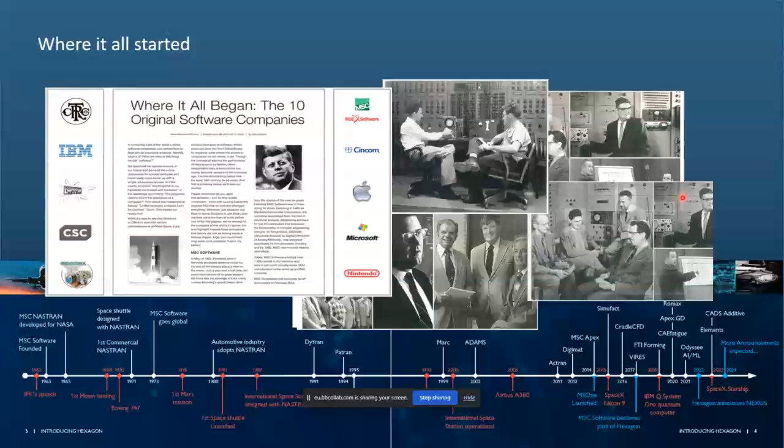Just to give a little bit of history, MSC Software was the first simulation technology to be created. It was created for the US space program, where MSC Software was appointed as the company to create a solver that can calculate, not the trajectory, sorry, I meant the stress calculation on the rocket during its trip in space.

So I'm not going too far into how we moved from there to then develop all the simulation. But at the beginning, it was just a solver, and then progress was made to add a user interface, to add other types of simulation, because at the beginning it was just load that was evaluated. Then we had sound and CFD. And this is what MSC Software is about.

Actually, everything in the market that has a sort of physics where the theory is known and well mastered is likely to have a simulation technology that goes with it. And the reason is simple. As you have seen in MSD, when you deal with the script, some actions can be repetitive and sometimes time consuming, and in business or industry, time is always related to money. And as I said earlier, the funds are limited. So all of those technologies have been created in almost every sector.

We have the medical one, electric one, the railway, automotive, aerospace. I can say some companies, for instance, in aerospace, we have Incoma in South Africa, or Paramount, that are also in defense. We also have heavy equipment like SIMTEQ or RAM equipment. And then we have the food industry. As I say, railway, we have Transnet for the railway, and energy and gas. We have Eskom or OPEC, for instance.

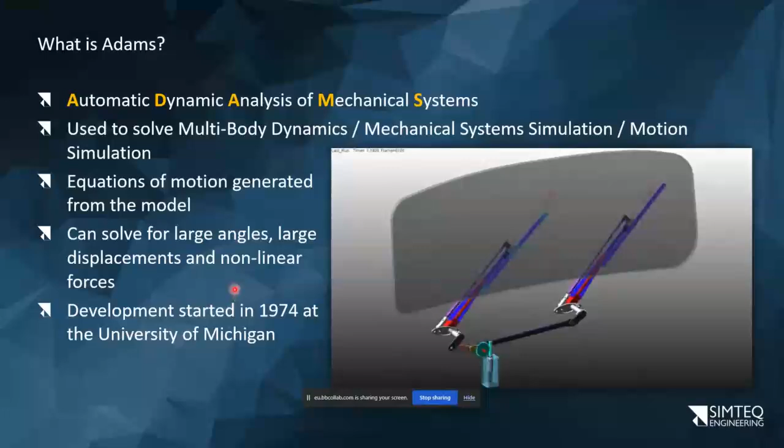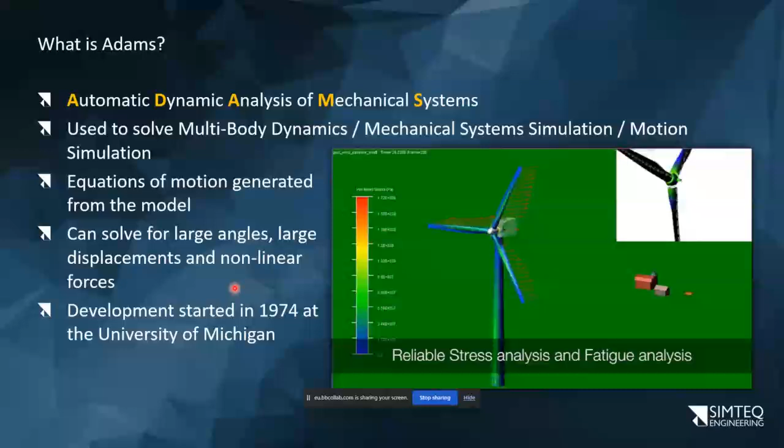It was created in 1974 at the University of Michigan. So at the beginning, it was not a commercial product. It was bought by MSC Software afterwards, but it was initially a university project.

So to the question, why build a multi-body dynamic model? It is firstly to identify what we have in the model. And what I mean by that is, firstly, to know how the model will move. This is just to see how it will move, how it will interact, which part will be in contact with another one, because there is always a difference between the design that is made for the production and the initial concept.

Because when a design is made, actually a CAD file is made, it takes into account some details like welding, like tolerances, but these are not taken into account when you are in the R&D phase, and when we want to first see how the system will move. For a simple system, it's easy to imagine how the system will move.

But when we have 100 parts moving and some are hidden behind some other parts, it's just too complicated for your eye to identify this one will move that way and will be locked or touched or will pass to a certain configuration. So this is the first use of Adams. It is just to take the simulation to analyze how this will move. It's valid for Adams, but it is a multibody dynamic general thing.

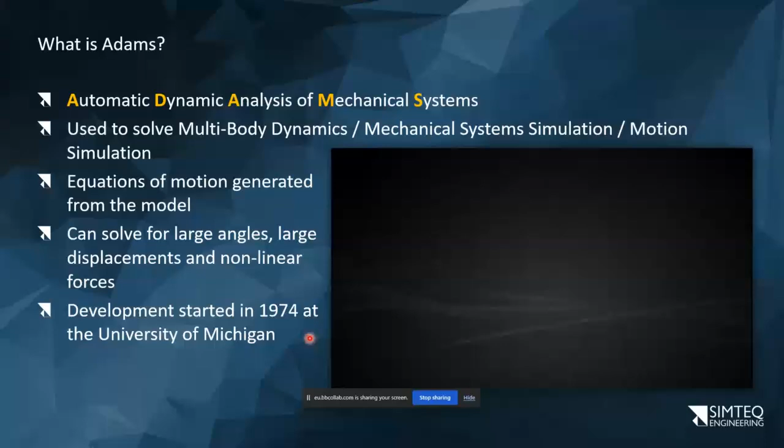So the principle here, as you saw in the first video, I can quickly come back to it if it's not too far, just to show it. This model actually uses a flexible body. Okay, well, at least you have seen that. So this actual model uses a flexible body coupled to a rigid body.

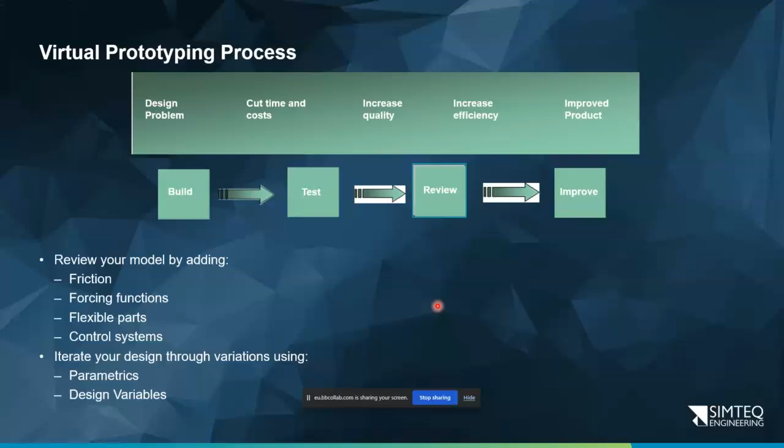So the point is, we can use dynamic load and extract it from Adams to apply it on the FEA model, or we can do it while running the model. Adams is not that powerful in terms of running flexible bodies. It does give some input or insight into what the stress and displacement are inside it, but at the end of the day, it's always better to use a proper FEM model if you want to work with flexible bodies. You can extract the dynamic load from Adams, but it will always be better to use a flexible body in a proper FEM model.

When we are done setting up our system for the first time, we can now run it. The good thing here is it's very simple to run. As I said, the first purpose when they created this software was to make engineers able to see how the system will work.

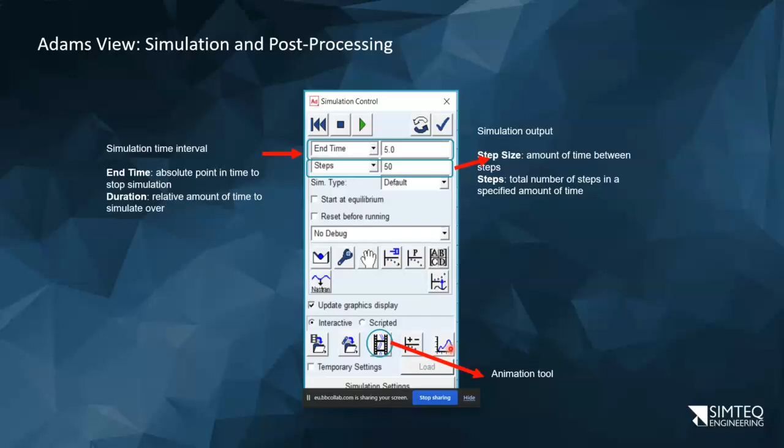Then we have the plot button, which allows us to get insight into different data that have been set before, the data that has been measured. When you press the plot button, we open the post-processing part of the software, where we can do two things: we can either animate it again, or just plot the curve.

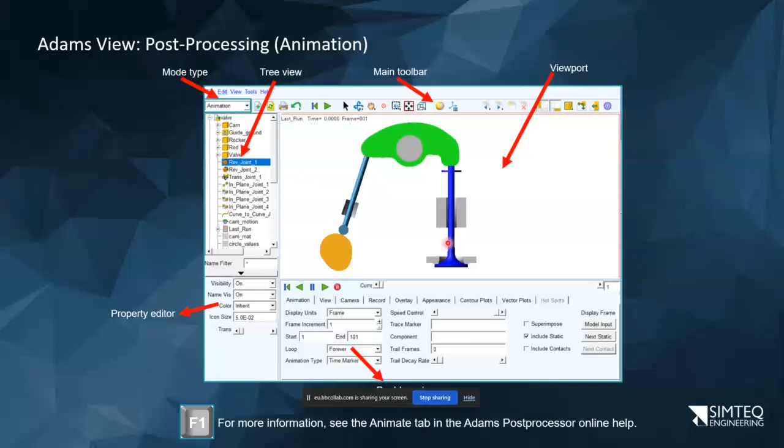At a certain point, when you have a particular case and want to see at which point of the animation there is a spike in the curve, for instance, we usually split the grid so that we can have the animation at the same time as the curve. Then you have a cursor that runs through the curve at the same time the animation is running. So on this side, you can decide if you want animation or the plot.

We have the tree view on that side. The property editor is where you can see the animation mode. So we have the property editor here, and then we have the ability to run or modify different parameters of the animation. Also, we have the viewport, which is not actually a working grid.

The toolbar here is really important because it allows you to have different insight into the software. Whether you want to just see something, or analyze something, or retrieve a specific part of the analysis, you will really need the main toolbar.

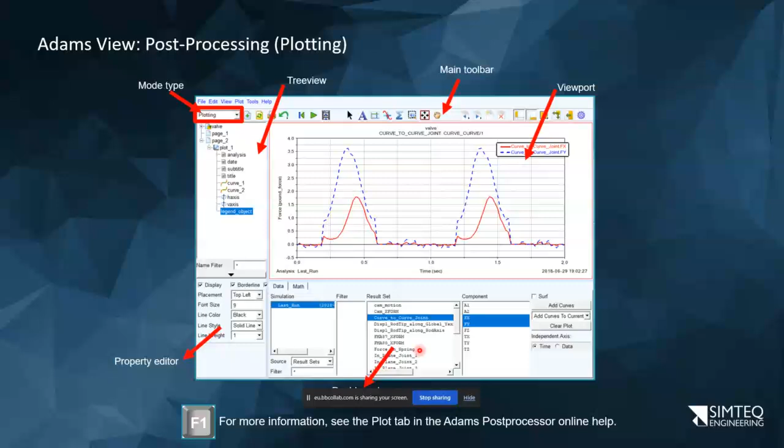You can either select it—meaning there are results that are measured anyway—but there are others that are not measured, and you have to pick them, set them so that you have the result that you want. There's also a different way of getting a result, and I'll get to that a bit later on.

So to illustrate what I explained, I will give you a simple example of a pendulum and the type of result that we can have. The thing that you do realize is...

At this stage we don't properly represent a system, and the reason is that it's simple—we use rigid body. The truth is, in reality, there is no rigid body. That means when we use multibody dynamics, we are getting insight into something, but a full simulation actually requires what you'd call a co-simulation, where you mix a powerful FEA model coupled with nonlinear FEA, coupled with CFD, coupled with multibody dynamics. This is life, but it's also really expensive. It's not always practical, but at least you have the insight.

Then we use ideal joints. This brings a particular challenge—the fact that there is no ideal joint in real life.

We always have to bear in mind that at the end of the day, a simulation is as good as the engineer that uses it. That means you will have more results than what you get from a script, for instance when you hard code something. The good expression is you're gonna get that result easier than when you use a script, but you still have to analyze it.

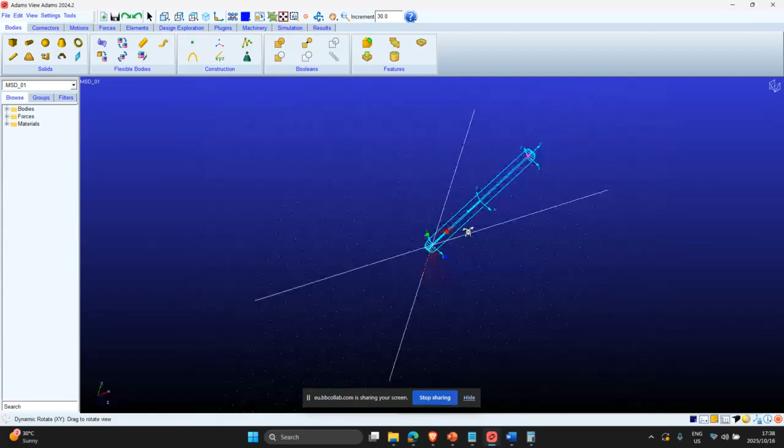I'm working on the 2D side, but actually it's a 3D model, so I can even change it for you to see. So it's a 3D model, but I can decide to just work on the 2D plane.

So this is a pendulum, so it will be really easy. I just apply a revolute joint between the ground and the part, and I select this point, which is a coincidence between the origin of the ground and a local coordinate system—actually a part coordinate system instead of the part.

That is it as far as the simulation setup. I can just directly go and simulate it. That would be a mistake, though, because I need to add the density properly. I'll set it to 2 seconds, with a time step of, let's say, 200. Now it should be smooth.

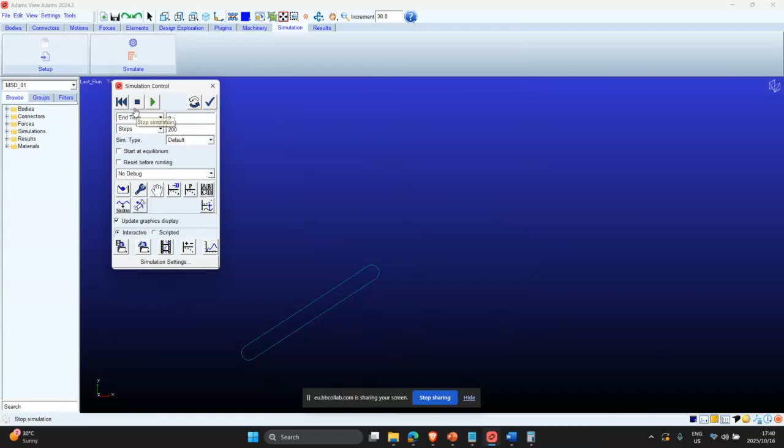As I said, I can run it again—I can just come back and run it. It doesn't take time because the system is simple. It would be more difficult if we had something complex with 1,000 parts, or not even that many. You get it easily, so just press on animation and you can have it without running it again, which also saves memory on your computer.

Once you are done with the simulation, there are different aspects of the simulation I could talk about, but I'll keep it simple this time, because the point of the lecture is to give you an introduction for those who will be interested in more training or more information about the system or the simulation. You can contact me and we can discuss what your needs will be.

So when you go to the post-processor, as I said, we have the choice between the plot and the animation. There's more to it, but we're gonna keep it simple. When you go to the animation, you just have to load the animation, and you can split the space to have two views, and I can just go on plotting on that side.

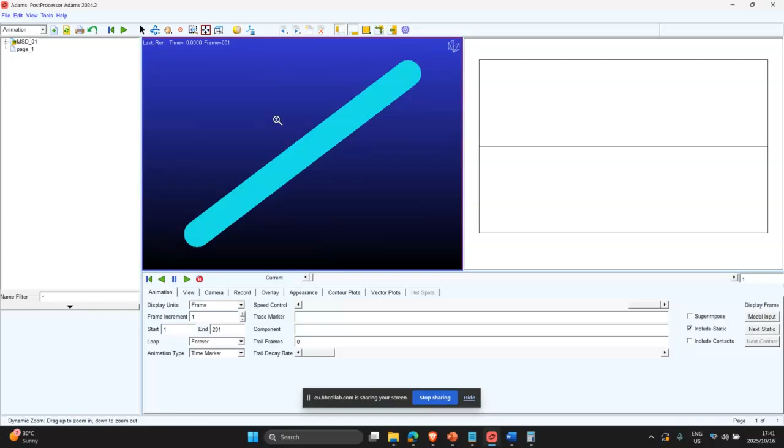When I'm on that side, to move from one side to another, you just have to click on it, and you actually see that there is a shift—a shift in the view. So just make it wireframe like that, and I will choose, let's say, to work on the result.

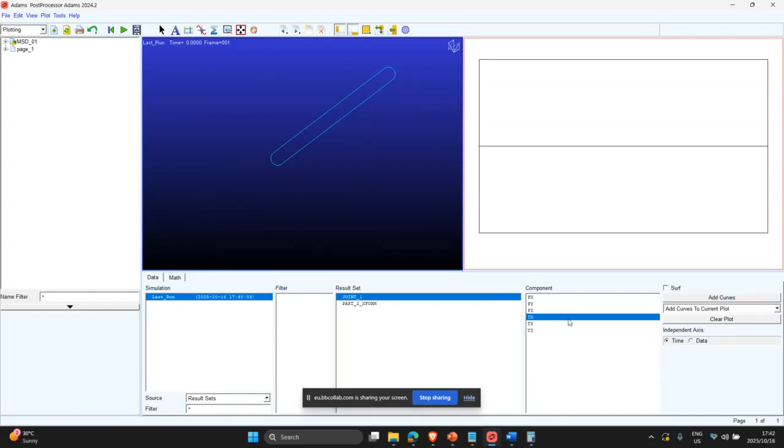I want to work on the joint and the torque applied in one direction. Let's see it like that. So we have the torque applied in one direction that is extremely high, because it's 1 million Newton millimeters.

That is about 1,000 Newton millimeter. Sorry, that is extremely high. That is about 1,000 Newton meters. And this is also one of the downfalls of using a perfect joint, because it can give some particular results. So that's why it's always important to refine the system as much as possible until you get a system close to the reality, because now you can start asking why we have this result. This is just an insight, but it's better to ask why we have the result afterwards.

We have the same case in the Y direction, in Z direction it is 0 as expected, and we also have the force applied here. So all of those results are meant to be analyzed. It's not something to just take. You need to answer the question why this happened like that. So when we go on the part side, this was everything that was applied on the joint that is located here, and I can even animate it just for you to see.

Okay, I'm trying to move this one. So I can go on this side and animate the system, and you can see on that side which part of the simulation gives which result. So this is really important when we have a case to be analyzed, to know exactly what happened when. In that case it is really easy to understand.

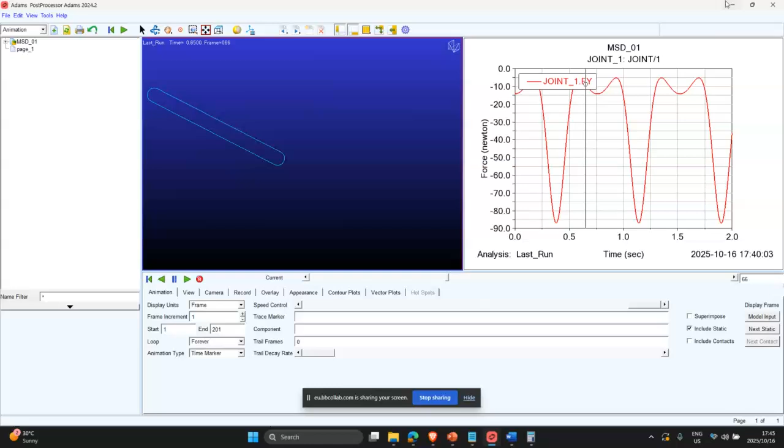If we want to take into account the resistance of the air, we need to couple Adams with a CFD software. We can provide that force, or we can assume the force that is applied on it and run a script at the same time as the simulation to simulate that force while the movement is going on. So this is about it for this demonstration. I can carry on with the presentation again.

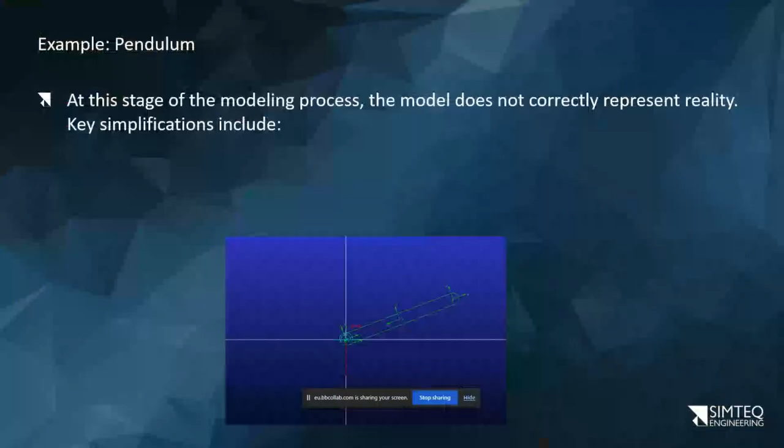So as I said, now we are going to the world of rapid prototyping. When we do rapid prototyping, the most important thing again is the data that can be extracted from the simulation. As I said, this is basic. When you get to write a report, you don't just put pretty pictures. You need data and you need explanation on what is going on. So the easiest and the most efficient way to get those data is to do the simulation. This is available for any type of simulation.

And in Adams, we need to keep in mind two concepts. The first one is at the design level: what you have to keep in mind when you are designing or working on Adams. And on the other side, at the force level, the second concept is which type of force or which type of data I can get from the simulation, how to analyze it, and how to evaluate it, because it is really important to know that your simulation is accurate. Most of the time it is required for engineers to be able to run a hand calculation of any simulation they are running.

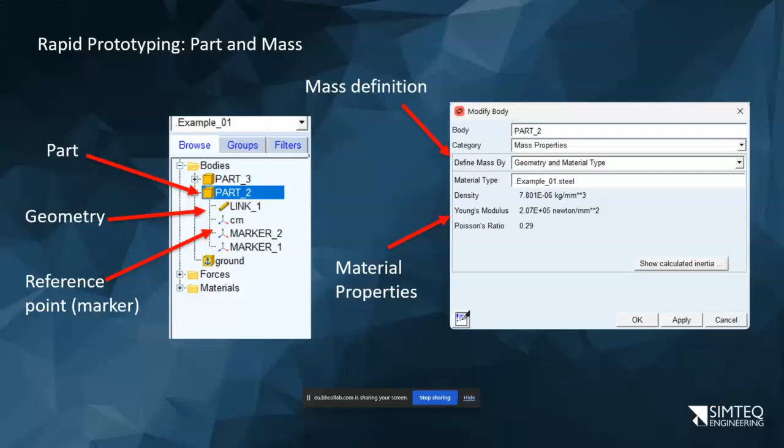What is really important is the center of mass and the marker inside of the part on its own. And if you don't have any geometry, you can still assign it directly. And the thing is, when you create a geometry, or when you import a geometry, Adams will directly define what is the center of mass, and will apply two markers. It depends, but most of the time it's two markers. And it will also give it a mass. And by default, it always gives the density, so the property of steel, to any part that is created or imported in Adams. This can be changed afterward, and I'll show how in the same way.

Then we have, as I mentioned earlier, the center of mass. It's created directly when you create the geometry, but the center of mass is linked to the concept of local coordinate system and global coordinate system. So technically, the global coordinate system in Adams is a rigid coordinate system attached to the ground, and this defines the zero of the system. By definition, everything is relative to the ground. That means to the global coordinate system. Then we have the local coordinate system, and in that we have two types. We have the marker and the part coordinate systems.

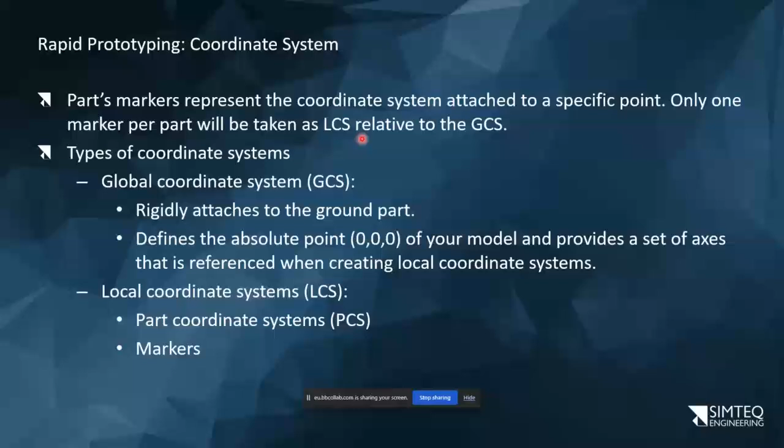Technically, the marker is just a local coordinate system that can be either added automatically by Adams on your model, or you can add it manually. The part coordinate system and the marker are defined by Adams directly in the model when you implement it, when you import it, or when you create it. But if you need for some reason to add another marker or a local coordinate system, you can add that one. By definition, in the part coordinate system every measurement will be made relative to that point, which will be the center of mass by definition. But this is something that can also be changed if you want.

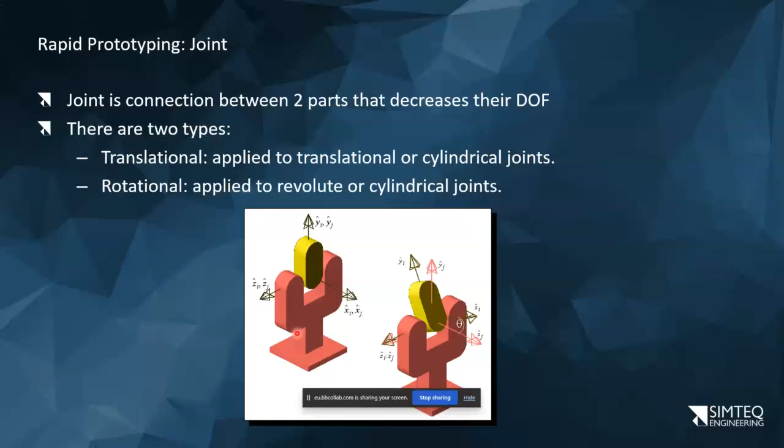And then we have the joints. As I said, the joints aim to attach two parts and also remove the degrees of freedom that those parts have relative to each other. So we have two types of joint. We have the translational type, like for instance the cylindrical joint or the translational joint. And we have also the rotational type of joint. For instance, the spherical joint or the revolute joint are rotational joints. And to better explain that, I will give you an example of a driveline that we can find.

Typically, this type of drive line is something that you can find in military vehicles, when you have the engine and the transfer case in two different places, and usually it's really complicated how the power must go from the engine to the wheel. In a tank, for instance, you don't usually have everything aligned like in a car.

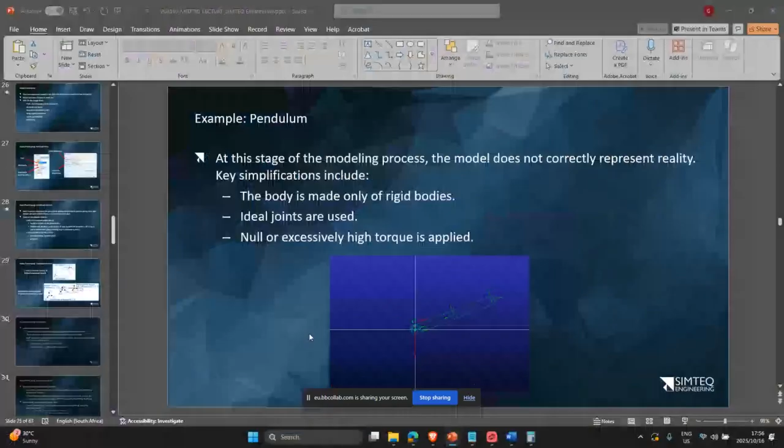So in that case, you need this type of drive line, which is actually made of Hooke joints and revolute joints. So I will use this example to explain the concept of parts, local and global coordinate systems, and also joints in Adams. So I will not save this one. Just open a new one. Okay, I will just open this one.

Oh, I also wanted to ask, I'm asking a bit late, did you start recording the session for those who are not there? Yes, I'm still recording, so everything is still good on my side. Ah, okay, okay. I should have asked in the beginning. Okay.

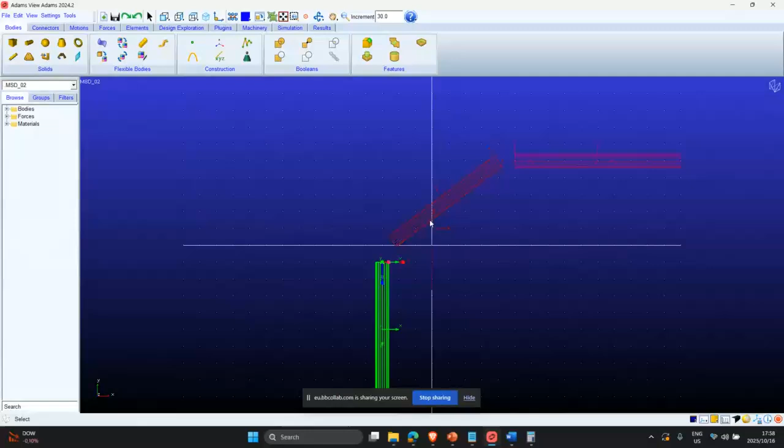So I will just open a new model, call it MSD. So okay. The working directory is the same, the gravity, the units are the same. Okay, I can just open it. I will use a cylinder. It's better to fix it, otherwise it becomes just difficult to manage. Okay. I will just keep it the same. Yes, it looks like it.

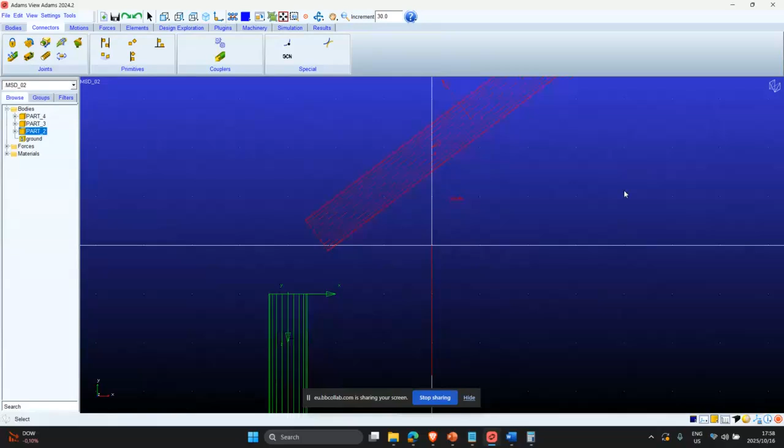Okay. So I will just apply the revolute joint in between this part. As you can see on this part, only one marker has been assigned on one side of the cylinder, not on this one. But if I want, I can just come here and add one myself. Choose add on the parts. So select the parts, select the point, not precise, and then I have a marker on that side. So that's about it on how to add a marker.

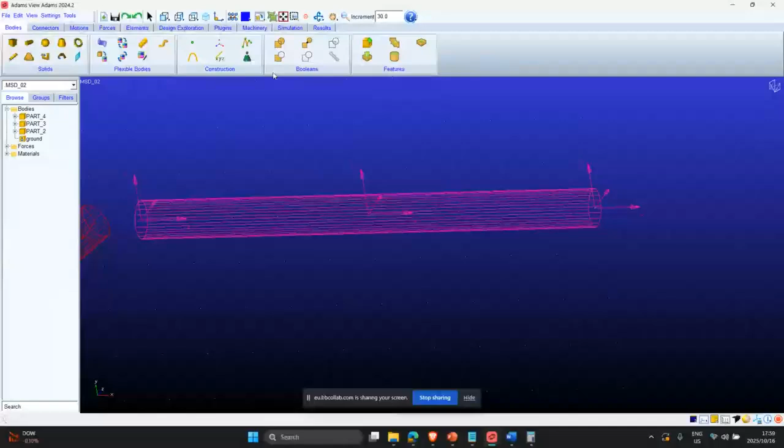This is really important because even though in that case this point is virtual, it doesn't actually exist, if you put a cursor on it, you will find it. On some geometry it's not useful. And if I had to add a joint at this particular point, like I want to add now, I add the joint by selecting the ground. Actually, we select the ground just by clicking on the working grid, and then the parts.

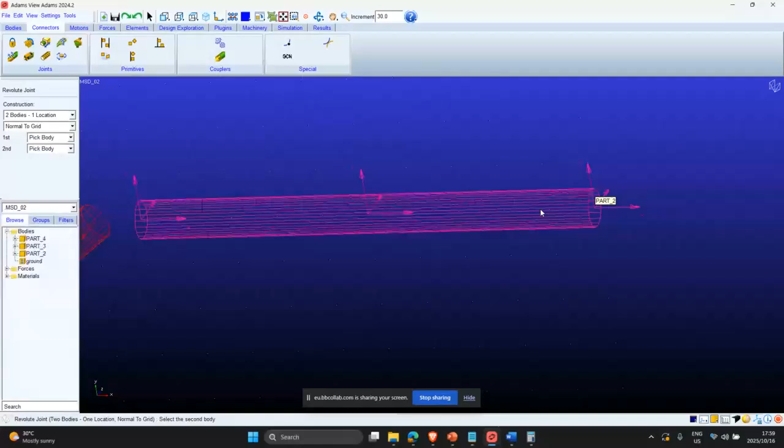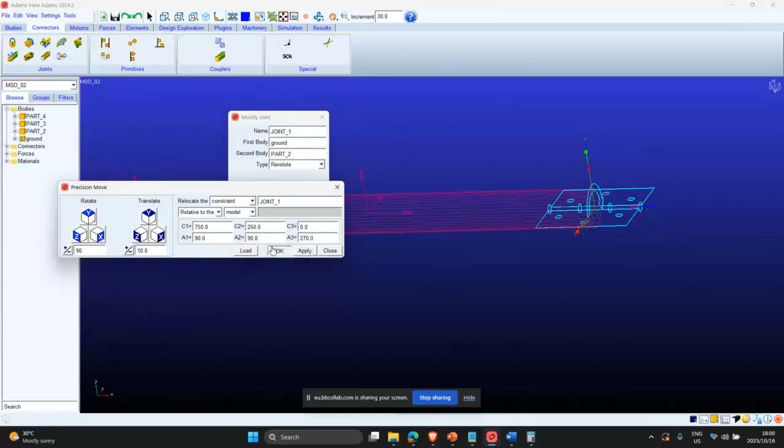And then here we have this, but again, we have to move it since it's not applied in the right direction. So I will just modify the joint a bit. Oh, no, I didn't click on the joint. Okay. So I can double click there to modify it. I can select this, rotate about the y-axis by 90 degrees, and just select this. And now the joint has the right orientation. Just apply. Okay.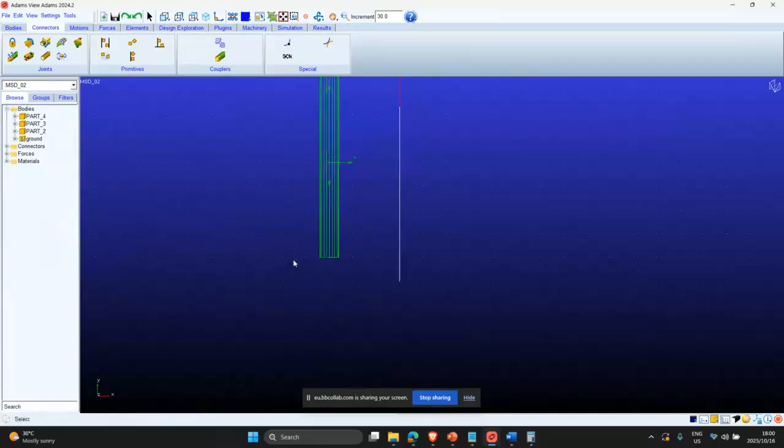This is exactly the same case for the part underneath here. Just to show you, okay. So I will not add a marker here, but you will see that we are able to select a point at this stage. This is just because the shape is simple and Adams is able to pick up what I want to do. But when the shape becomes complex, it's always better to assign it.

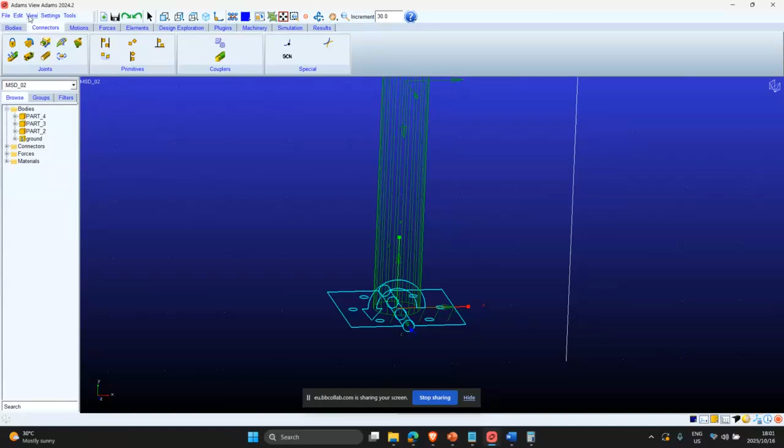So I need to rotate it around the x-axis, this one, to have it aligned with the cylinder. Otherwise, I won't be able to spin it. So again, I can just select the orientation like this, 90 degrees around the x-axis, and that's it. Okay.

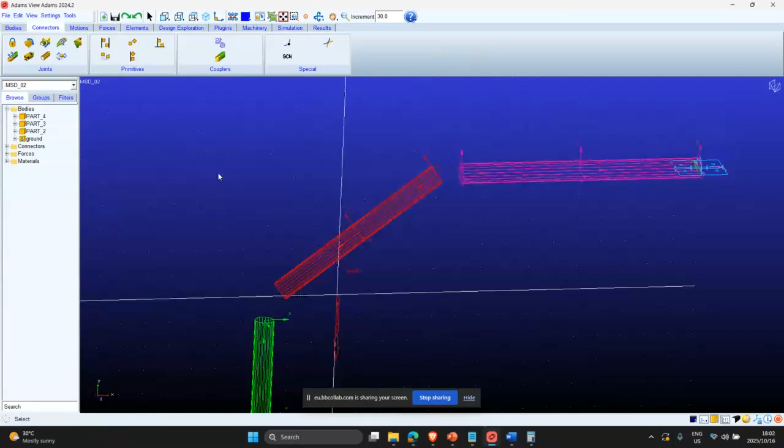Then I will add the Hooke joint between those two. Since I'm working on a plane, I don't have to worry about the alignment of the cylinders because I know that they are aligned. So the Hooke joint will work. But if it was too offset, it could have been a problem. Even if Adams always tries to solve those types of problems, it's always better to have an accurate system.

So I will just create a Hooke joint, this one, between those two parts at, let me zoom a bit, at this point, following this feature and this one. So usually the good thing to do is to always do a sanity check to make sure that everything is fine when you are modeling a system.

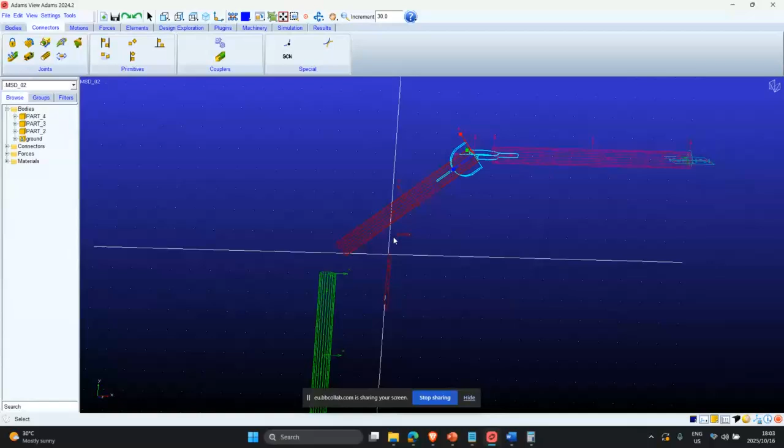The reason is, if you put too many constraints without checking, you can reach a point where, how can I say it, you put in too much effort and you didn't realize that you made a mistake, and now it's difficult to find the mistake, since you didn't check at each step. So it's always important to do sanity checks on your system, especially when you start.

Then I will apply the Hooke joint on this face, between those two. So it's between those two at this point, following this feature. Okay. You see, now the problem is it's not pointing in the right direction. And the reason is very simple: I didn't define any, how do you call it, any marker pointing in the right direction, but I can still make it. No. Okay, for some reason it's not working, so I will go the other way around.

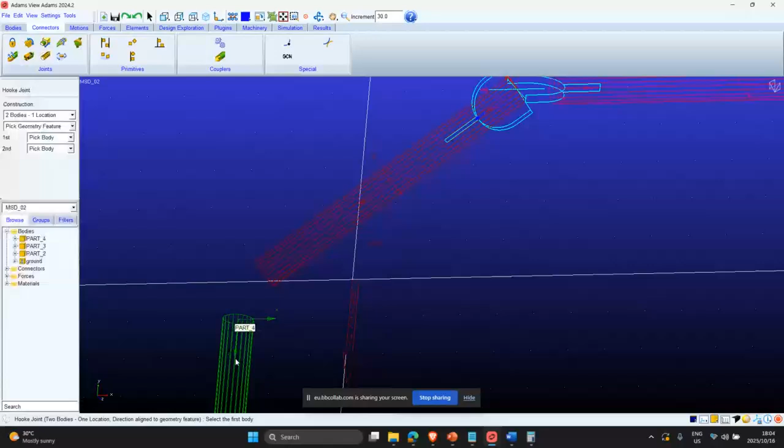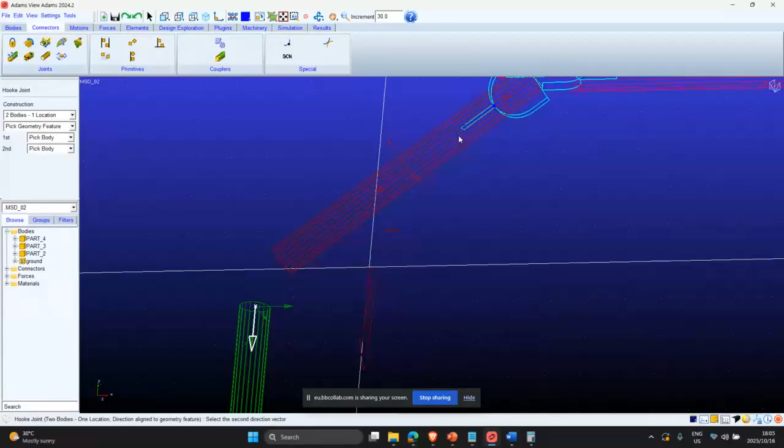Since I have this marker, I can design between this one and this one. No. It's better to use it that way. You see, this is the reality of anyone who deals with design. Even if you are used to something, you can always have an issue at a certain point.

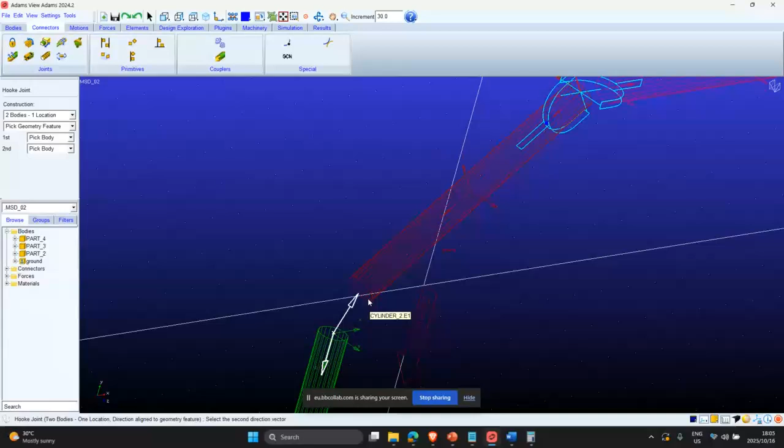Okay, this is because the difference between both of them is too large. I cannot. Yeah, the difference between both of them is too large. I have to change it a bit. And this is what I meant by the offset. Now I cannot point it properly because there is an offset. And if I leave it like this, it won't be able to spin. And if I run it right now, you will find the mistake. So to solve this problem, I have to align it to make sure that the joint will work.

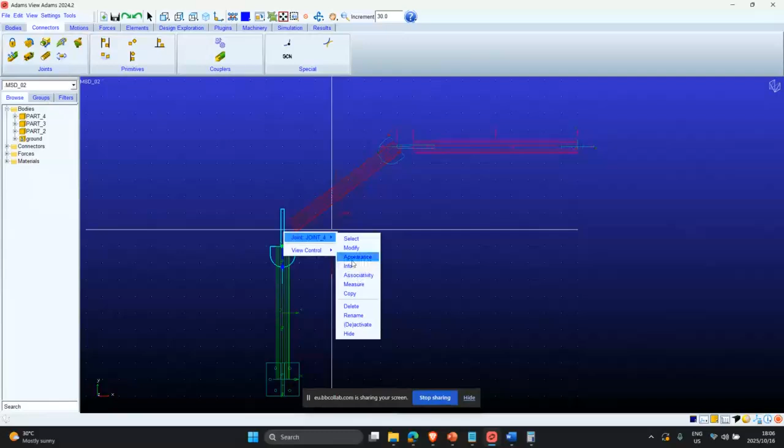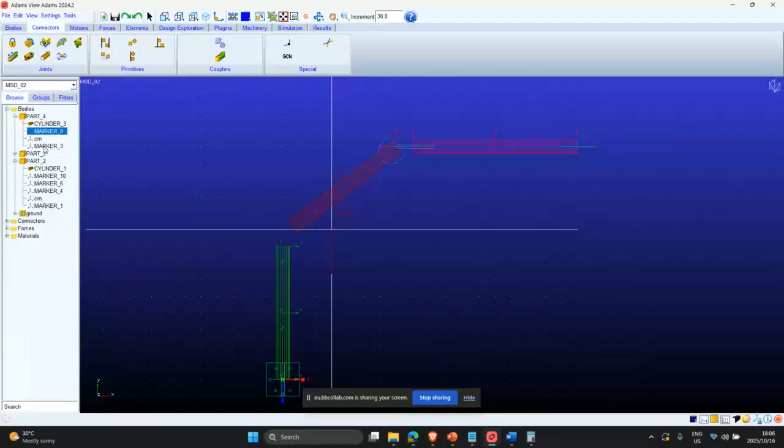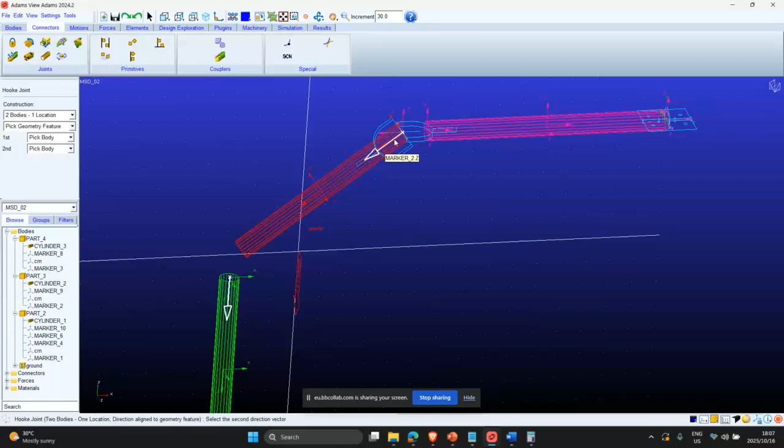And this is okay. I actually created this part, but on the real design, you will always find that it's not aligned enough to apply a Hooke joint. I will just delete that one. Okay, I can change. Oh, no, this is the extension. Okay, it's going on your right. Technically, it should be fine now. Okay, looks like I still have the same issue. Let's see.

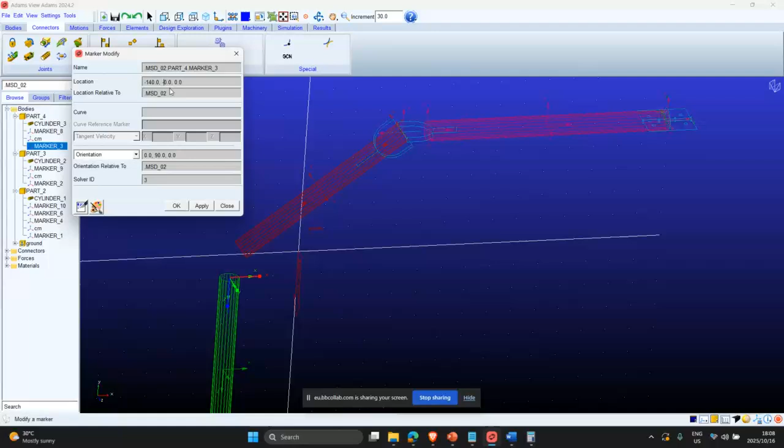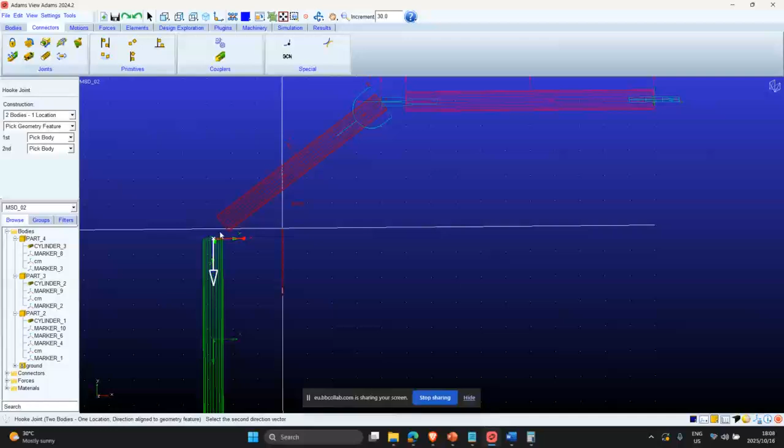Okay, this is the reality of doing a live demo. Okay, I don't know why I'm struggling with this one. It's not supposed to be like this. I'm not sure that this one will work.

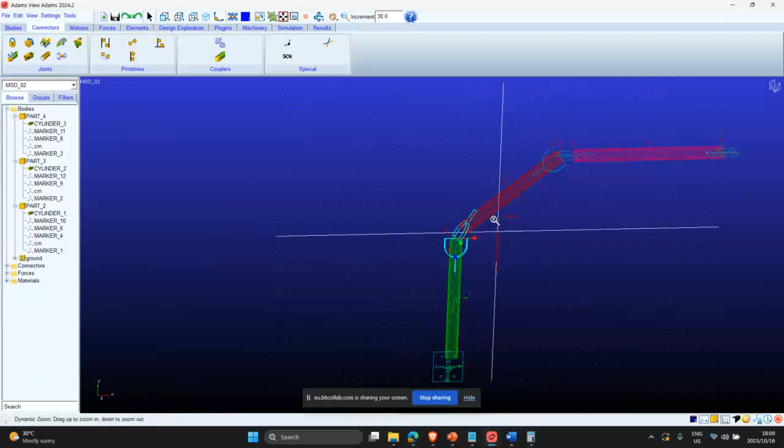Sorry, Gal, just a quick question from my side. Although we're now working with a fairly simple geometry, would it not be easier in this case to specify a marker on this left-hand side of the cylinder to get that vector that you're trying to construct? Yes, I will do that. I was trying to avoid that option, but I think I don't have a choice. I have to.

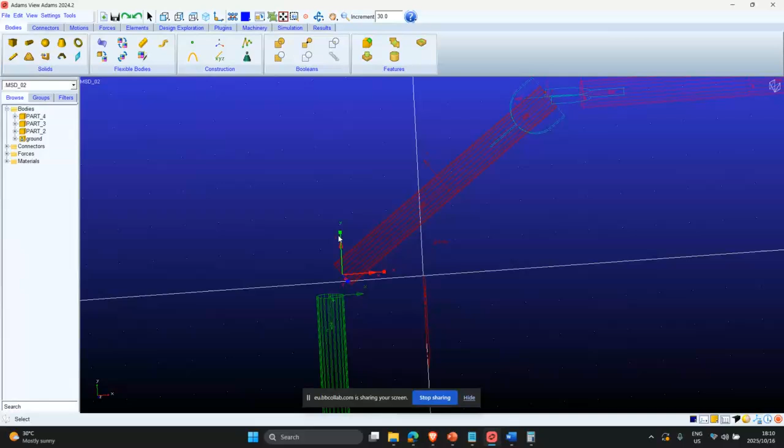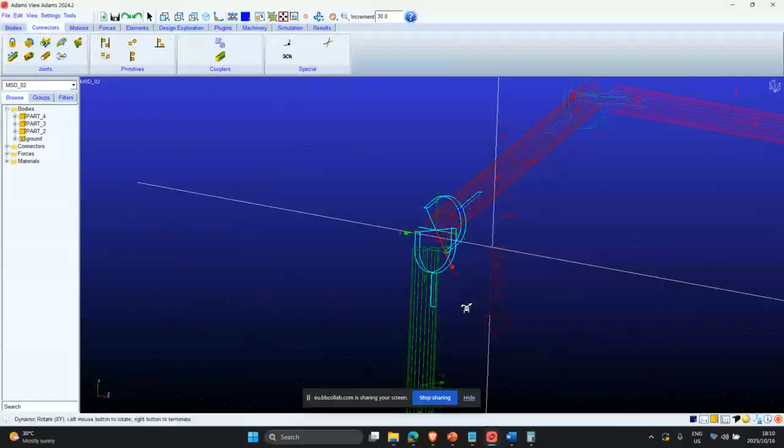Actually, I tried to avoid it because now I have to find the right angle to turn this one. So this is also the reason why I was trying to avoid it, because I'm dealing with complex geometry. The good thing to do in that kind of situation is to technically apply it on this one. Okay, that's correct. I'm a bit worried about this offset, but let's try it to see if it's working. If it's not, we have to make it easier.

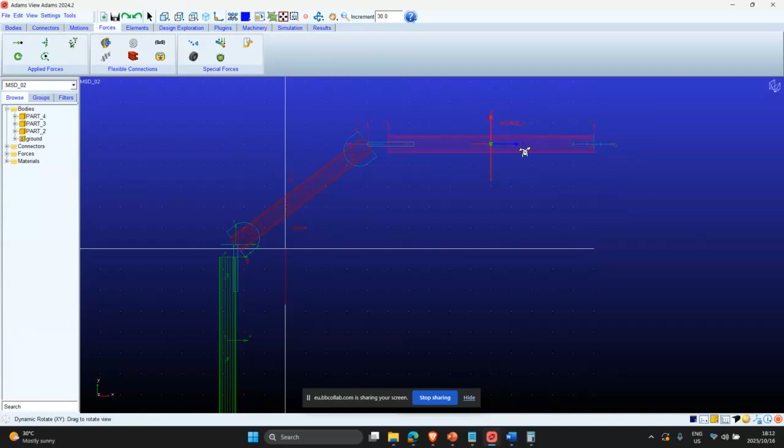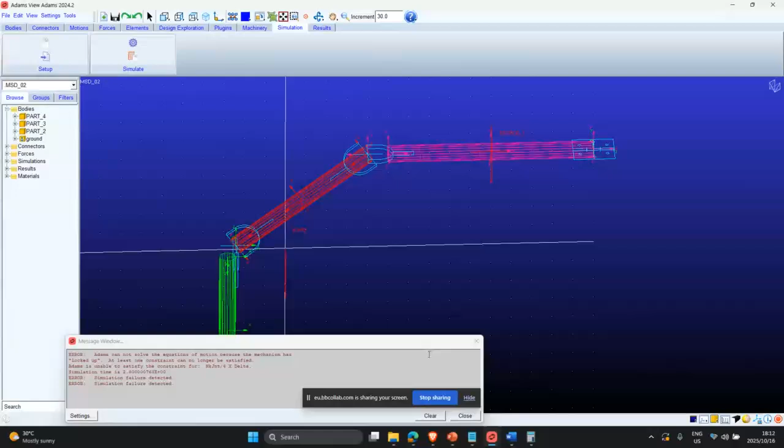So you see, because this is not aligned, I cannot run it. So what I will do is, the thing is, I kind of saw this coming. So what I will do rather is use the model that I prepared. So this model doesn't have a problem because of how close it is. The problem is it's sometimes difficult to find exactly how close it is here.

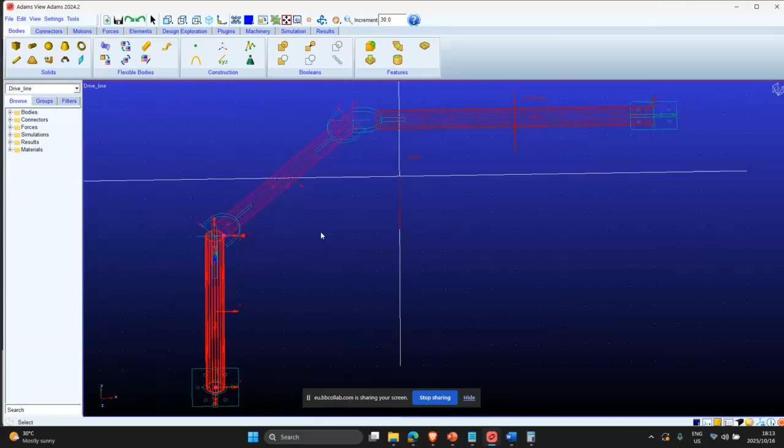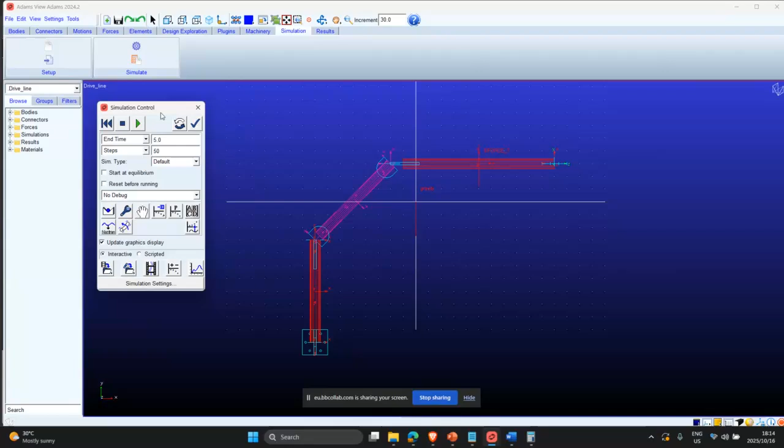So on a model like this, we can actually run it and you will see that it will work. It's just a pity that I couldn't create it from scratch right now, but it's better to have a plan B instead of just spending a lot of time on one model. Sometimes for a simple thing, you can spend a lot of time because you don't have the right coordinates, but it's something that can be solved. Just that it can take time sometimes.

So since I was talking about the part, when you create a part like this and you go on modify, you will see that those properties are already assigned. So the Poisson ratio, the Young modulus, and the density. You can either compute and find the mass and the moment of inertia based on that, or you can have what we call user input. So literally I can change and say that I want my model to be 50 kilograms or something like that, apply it, and it will be applied and it will work at ease.

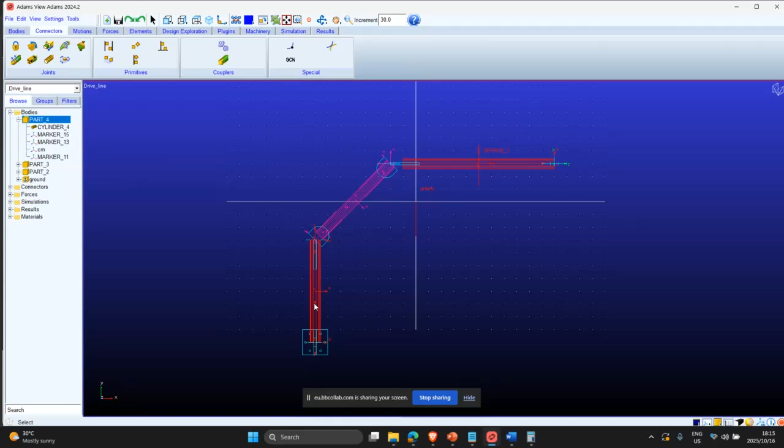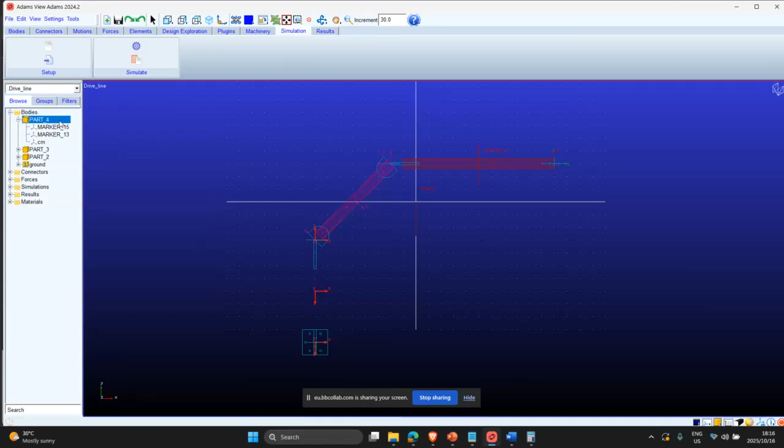For the part, as I said, even if for, let's say, part 4, this one, you decided to delete the geometry, you can still have a part here that is identified. So when I select it, it's still glowing up, and technically I should be able to run it. The thing is, we don't see the geometry, and everything that is linked to the mass must now be written down on the characteristics. But technically here I won't be able to compute it anymore since I don't have any geometry anymore. So that's the way Adams works.

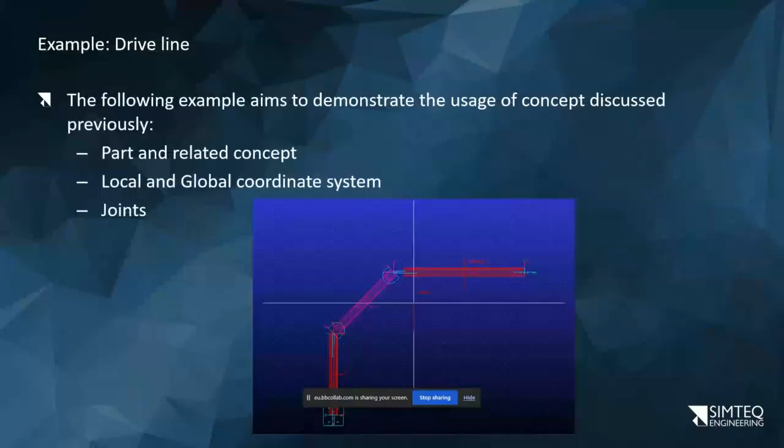So just to carry on the presentation, after talking about the part, global and local coordinate system and joints, we now have to measure the data inside of the system, and this happens by using global and local coordinate systems. Basically, when you run a simulation, the measurement will be taken between the part coordinate system and the global coordinate system. And most of the time, the standard measures are the torque, the force, the displacement, velocity, and acceleration. This is basic in terms of measurement.

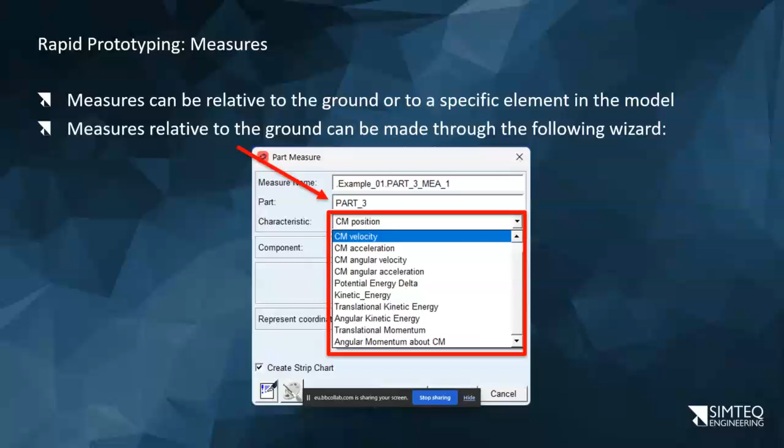But if you want something else, let's say the displacement between 2 points inside of the system, or the orientation between 2 different coordinate systems, or how it evolves during the simulation, that's when you need to specify them, and there is a way to do that. So these are the typical measurements that can be done inside of the system: center of mass position, velocity, acceleration, angular velocity, angular acceleration. This is just a list, it's a bit longer. When you want to take specific measures, you need to use this part where you can either use the standard measurement, or define them manually by yourself.

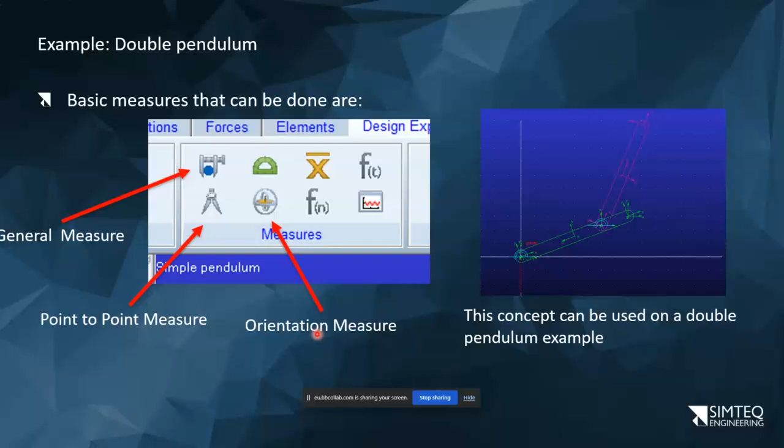And by doing that, we have this example with the general measure that can be taken here. There is actually a different way to do that. The point-to-point measure is when you have 2 different points and you want to see the velocity of one relative to another, or you want the orientation. That's the one I mentioned earlier, where you want to define the evolution of angles between 2 different axes, or 2 different markers.

Then we are on the second level. The first level was when we had to think about the parts, and on the second level you have to think about the forces applied in the system: the spring damper, the torque, the contact, bushing, friction, and there are others that you can find. And to illustrate this, I will show you an example with a simple model. It's a slider crank, but now a slider crank where we have contact between parts and we also have a spring damper.

So if I ask you to find the speed or the torque needed to get the slider to move back and forth at a certain speed or to stop at a certain point, you can find it easy with a slider crank. It's kind of easy to find it. It takes a little bit of time, but it's still easy to find it.

But now when you start adding parts like spring damper, when you start adding bushings, when you start adding other components, it becomes difficult to find a solution. And at the end of the day, 30 minutes of calculation won't match 2 minutes of simulation. So it's kind of a trade-off you have to take when you're working in industry. But it's really important to always do a sanity check by doing a calc to have an idea of where you're going.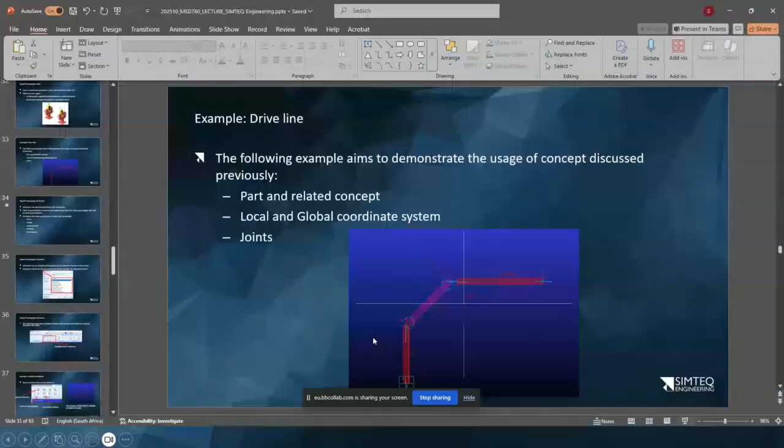And to just illustrate the concept of contacts, I will take something that is way easier than this example. Let's take this one. For something like this, I can keep it that way. I'll change this one. No, this one is a mistake. Okay, this one is more accurate. I will just make it 40, like this.

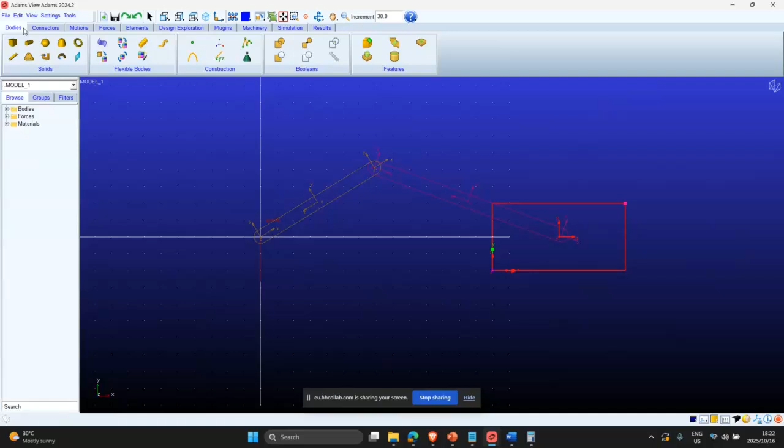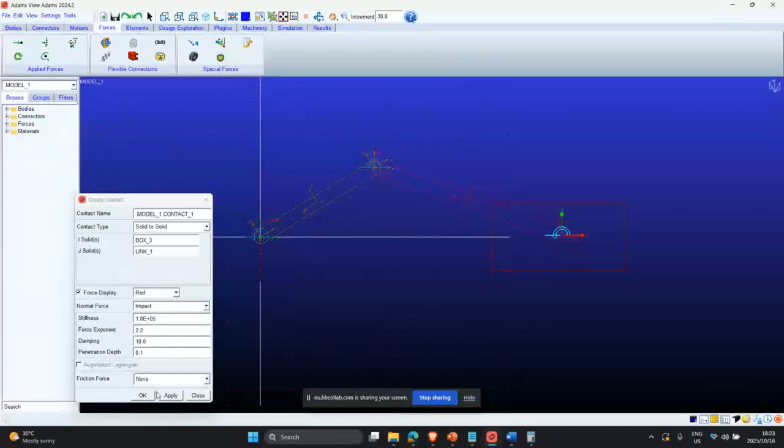And I will create a connector between them, so it's the ground and these parts between these two parts. And between these two parts, I will also create a contact force. I'm using basic parameters between them and apply it, well, apply it twice. And just run the simulation like this.

So again, 2 seconds, 200. Ah, yes, this is why it's really important to always do a sanity check, because I forgot the translational joint between the ground and the piston, that direction.

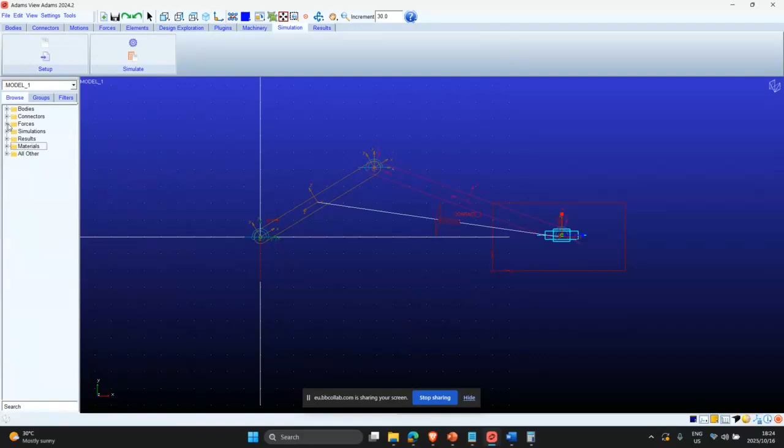Okay, the simulation is too short, so let's push it to 4 seconds, 400 steps. So as you can see, there is a contact force with that one that will not exist if I just remove that. So I can deactivate it. I'm not deleting it, I'm just ignoring it during the simulation. And when we do that, there are no more contact forces.

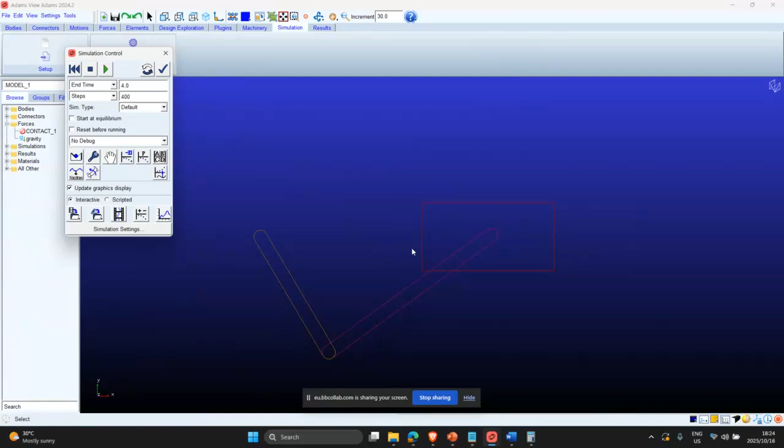And I can actually plot both of the systems to see what is the difference between them. Okay, I didn't save the last simulation, I should have done that. So now I can... this is a pity, I should have saved it.

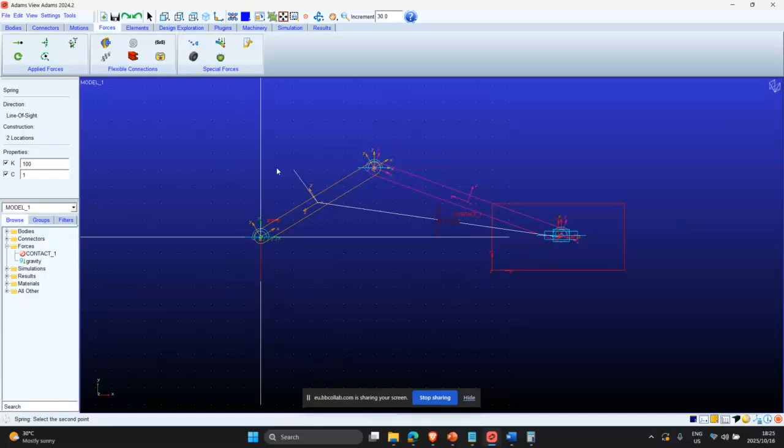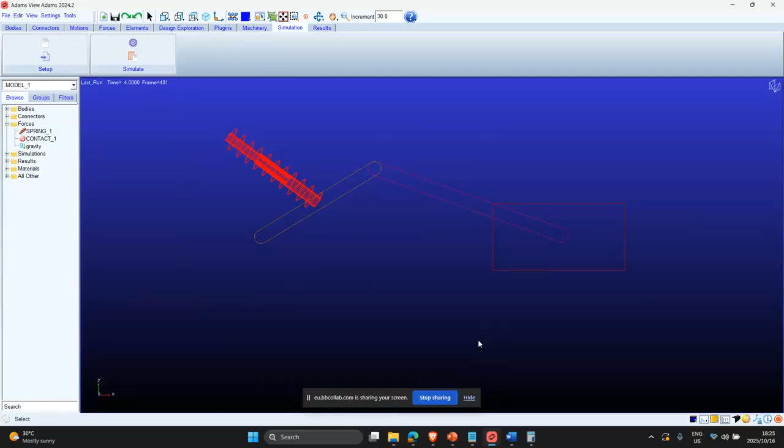But again, when you want to make it more difficult, add, for instance, a spring damper. Let's say you add a spring damper here with a stiffness of 100 and a damping of 1 between this and the ground. I didn't add any preload, but now the behavior of the system changes. It's not even moving. I actually have to add a force to make it move, otherwise it's just not moving.

So these are the concepts, these are all the concepts that you have to take into account when you want to ask a question, when you want to answer a question. How are you going to answer it? And I think for this one is self-explanatory.

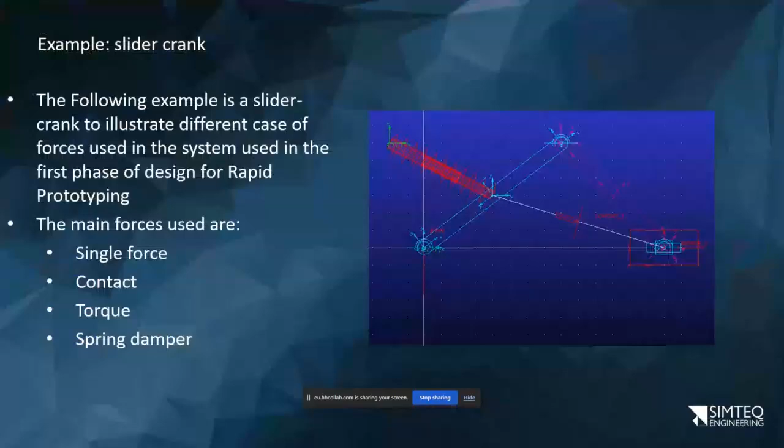I've done a couple of simulations so far, and this will be the last slide of today, at least on my side, because so far I've been presenting simple simulations, but there are complex systems that can be simulated. I can actually just show you this at an advanced level. It's just to show you, it's not to learn now, because you need a lot of practice on the first version of Adams that I showed you to do something like this.

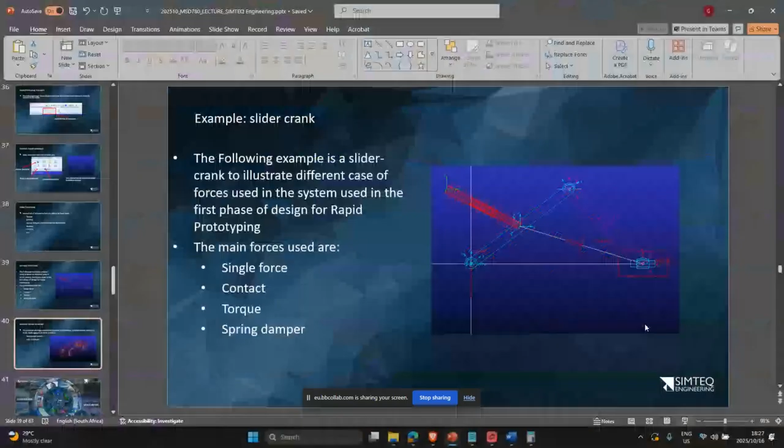But I can run either something like this or something even simpler by using a spring damper model. A suspension, I say spring damper, sorry for that, a suspension. I can open an assembly. Why is it not selecting?

So again, this one is when you are really advanced and you want to test a suspension system, or different configurations. You can now see the complexity, and this type of system is difficult to do by hand.

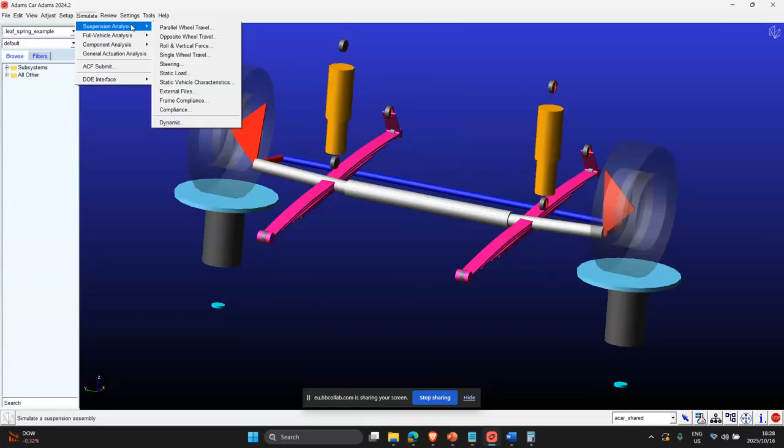So to do a simple simulation, I will test a parallel wheel travel for an output. Let's call it test 0.3, because I ran it twice already. All the parameters are straight, I can apply. Okay, that already exists. Let's say it's 4. That already exists too. Okay, I don't know how many of them I ran today.

Okay, I didn't run the full car simulation because it can sometimes take time, but with this one it's just a couple of seconds, so I can just review it. Animation control.

This is just the reaction of the suspension to a certain displacement of the test rig. So those two are part of the test rig, and the wheel is also attached to a suspension system, the one we are working on. This is a simple test that's usually run in a car company.

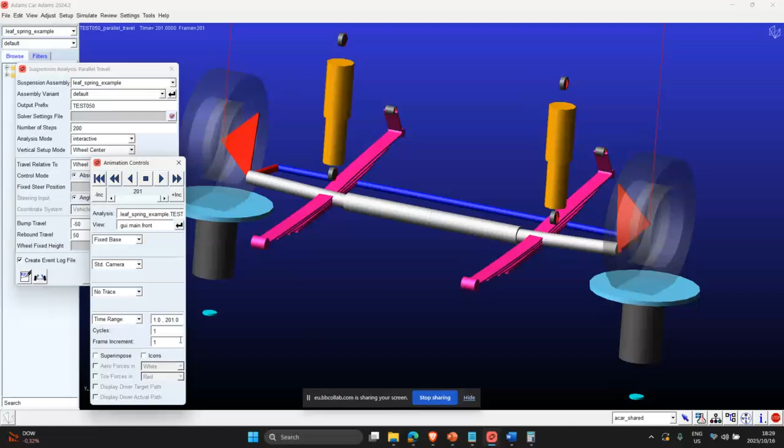If you want the results, you can go on review, post-processing, and we have different results for the displacements. Maybe this one - we have displacement of this leaf spring around x, y, z. It's because the simulation is short and the result is not that long, but that's about it. We can go really in depth in terms of simulation, but this is just a simple example.

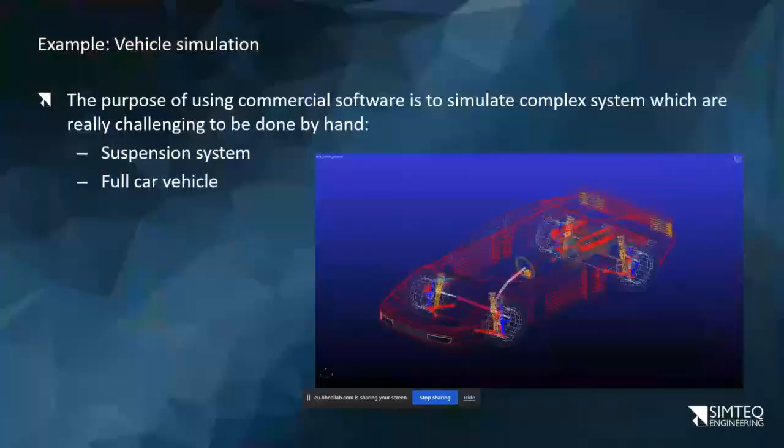And that will be about it for today from my side. I don't know if there is any of you who has any question.